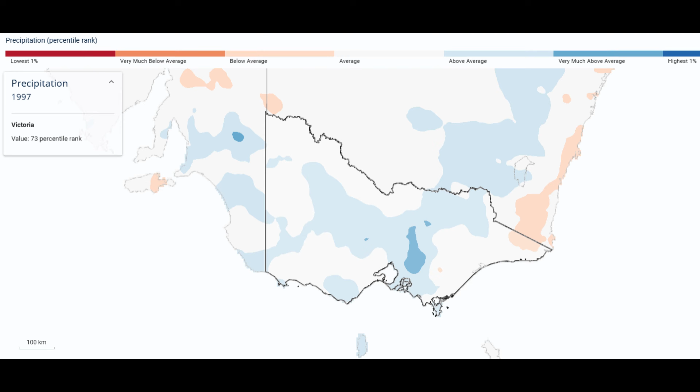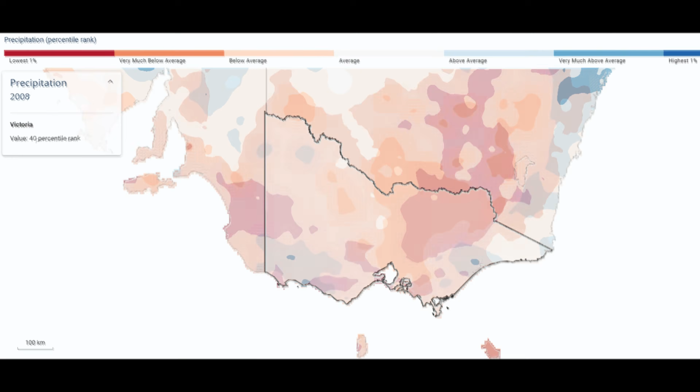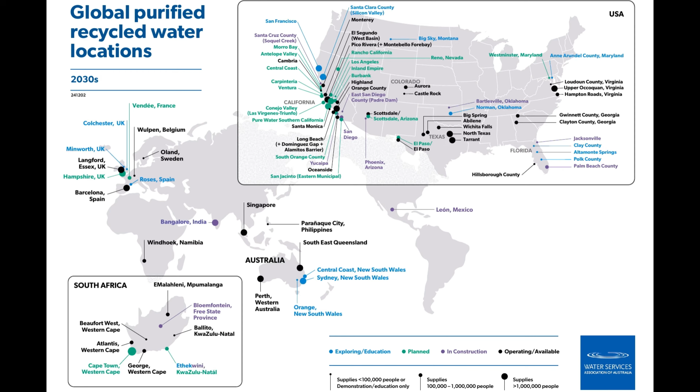As climate change intensifies and Melbourne's population continues to grow, traditional water sources like rainfall-fed reservoirs and rivers are becoming less reliable. Even with desalination and conservation, we need to think beyond old models. One idea gaining global traction is purified recycled water. It's already happening in places like Singapore, Orange County in California, and Windhoek, Namibia. These cities are turning wastewater into safe, high-quality drinking water using a process known as advanced water purification.

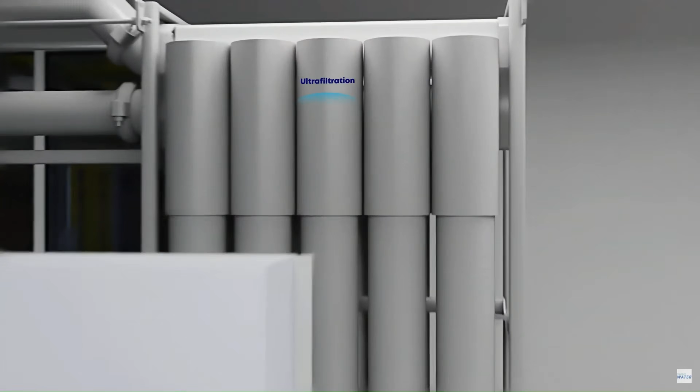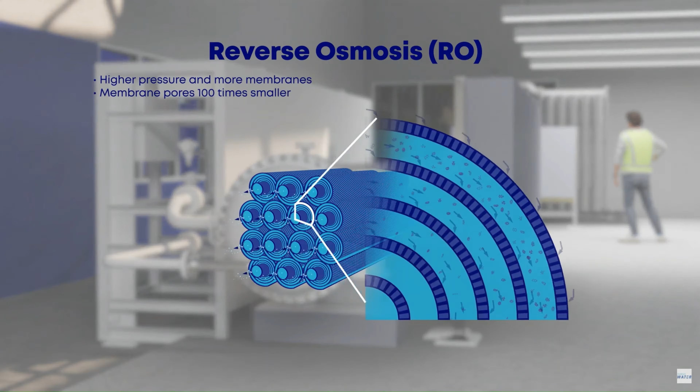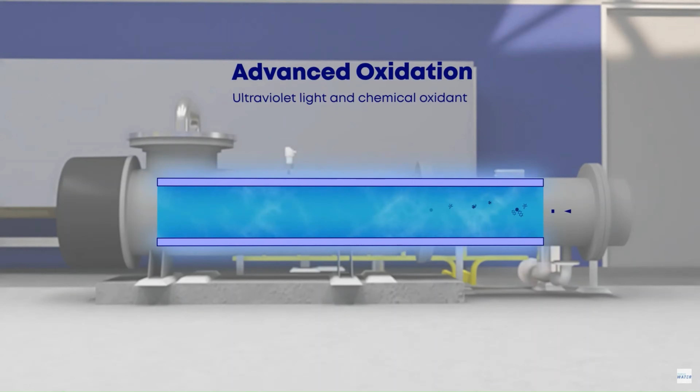So, could Melbourne be next? Let's explain how it works. Advanced purification begins with secondary treated wastewater, water that has already been cleaned of solids and contaminants. It then passes through a series of treatment barriers, including ultrafiltration to remove bacteria and suspended solids, reverse osmosis to eliminate dissolved salts, viruses, pharmaceuticals, and other micropollutants, and ultraviolet disinfection, often combined with advanced oxidation, to destroy trace organics and ensure human safety. The result is ultra-pure water, often cleaner than conventional drinking water.

In some cases, it's so devoid of minerals, we actually have to add things back into it to ensure it doesn't pull those key minerals from our own bodies as we consume it. Yep, that pure.

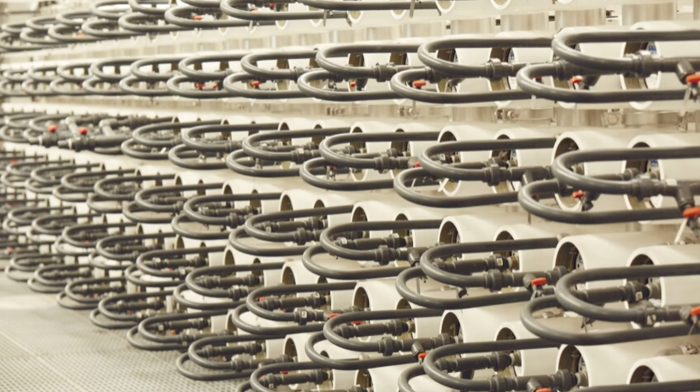Importantly, these aren't theoretical technologies. They're tested, regulated, and already in use. In Singapore, the NEWater system supplies up to 40% of the nation's demand. In California, Orange County's groundwater replenishment system has been operating for over 15 years and produces millions of litres a day. Windhoek has been using direct potable reuse since the 1960s, setting a global precedent.

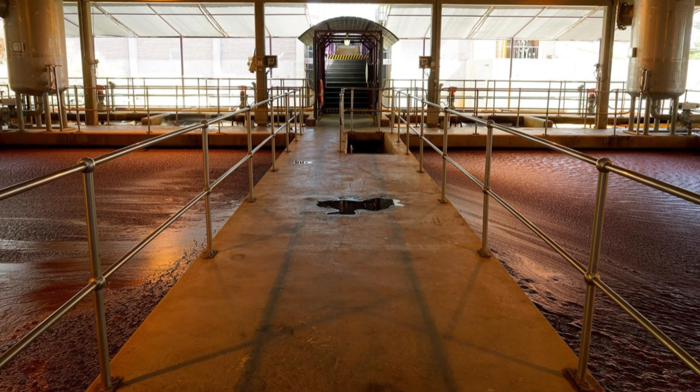So what's holding Melbourne back? The answer isn't technical limitations, it's perception. The phrase toilet to tap has been a stubborn barrier to community acceptance, but it's a misleading term. In reality, all water is simply reused, and it always has been, whether through nature's hydrological cycle or our own engineered systems. It's the same stuff that dinosaurs drank and peed. That's right, we're drinking millennia-old dino pee.

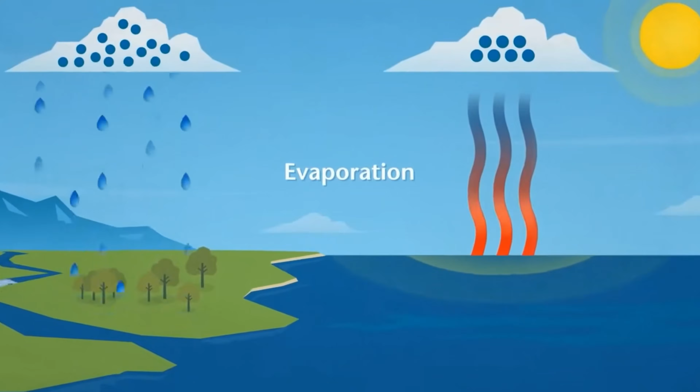When it rains on a farm, it soaks into the ground, flows into a stream, and eventually reaches your tap. It's passed through countless environments and biological processes. In numerous locations throughout Australia, inland towns draw water for their own supplies downstream of other towns, whose treated wastewater has often been returned to the same stream. So indirect reuse is already around, whether we want to acknowledge it or not. Advanced purification simply accelerates and controls that natural process, removing more contaminants with greater precision.

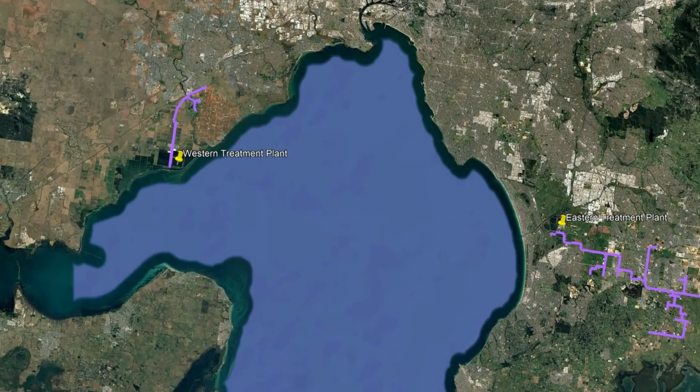Here in Melbourne, we're already recycling water for non-drinking water uses. Class A recycled water from the Eastern and Western Treatment Plants is used to irrigate parks, golf courses, and farmland. In many new housing estates, it's piped directly into homes for flushing toilets and watering gardens. The next step is considering whether purified recycled water should supplement our drinking water supply, especially in drier, less predictable climates.

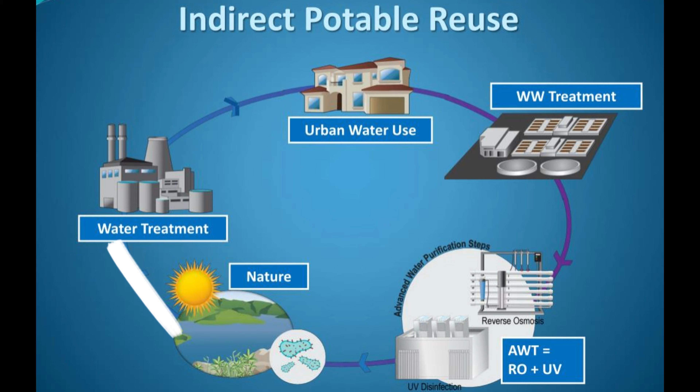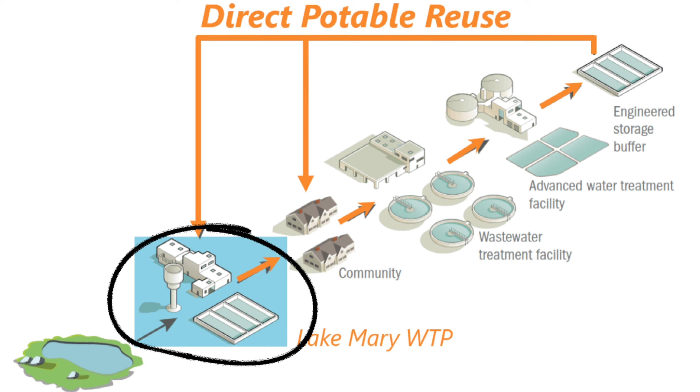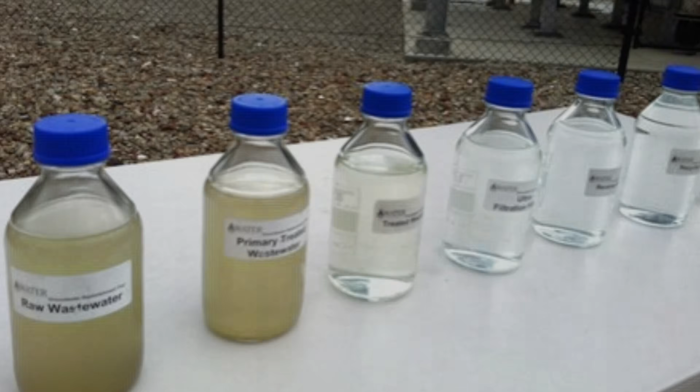There are two main models: indirect potable reuse, IPR. Purified water is added to reservoirs or aquifers where it blends with existing supplies before undergoing conventional water treatment. Direct potable reuse, DPR. Purified water is introduced directly into the drinking system under strict monitoring and real-time controls. Both approaches are being explored throughout Australia. Perth already has an IPR scheme, where purified recycled water is injected into deep aquifers to replenish the city's groundwater supply.

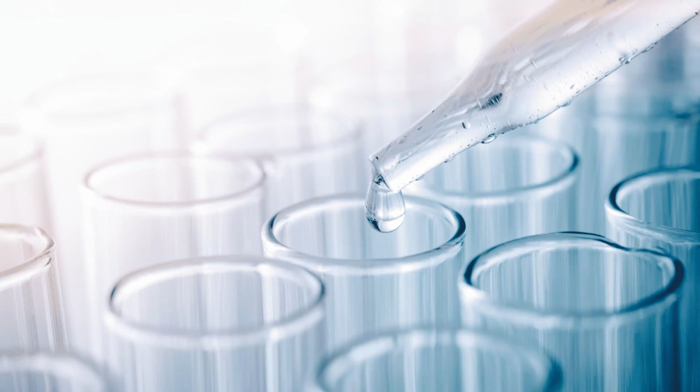For Melbourne, the main challenge isn't technology, it's building public trust. Community engagement, education, and transparency will be critical. Global case studies show that acceptance grows with familiarity. When people understand the science, the safeguards, and the benefits, support follows. That means engineers and scientists must play an active role in public communication, not just behind the scenes, but out front.

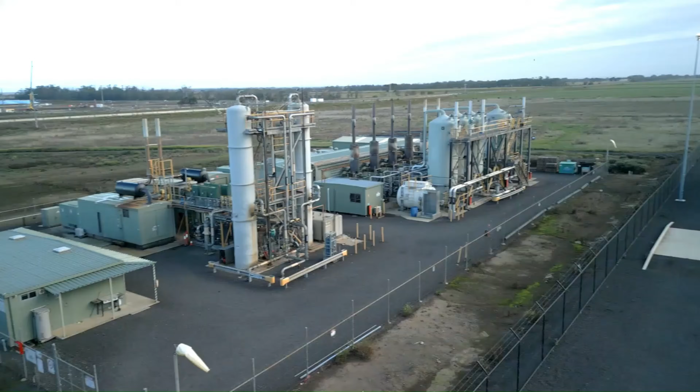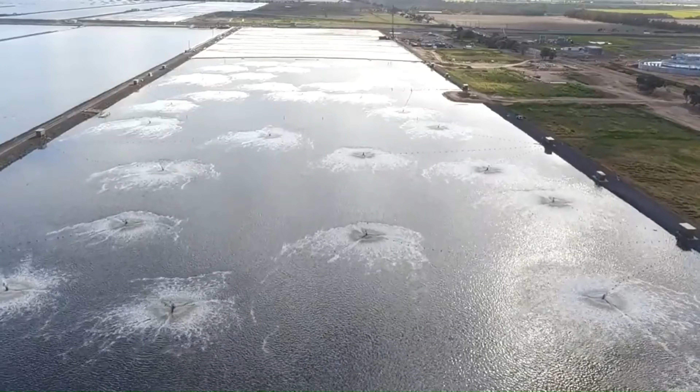But water isn't the only resource hidden in wastewater. Modern treatment plants are also becoming hubs for energy recovery. As sewage breaks down, it releases biogas, mostly methane, which can be captured and used to generate electricity. At the Western Treatment Plant in Werribee, Melbourne Water produces up to 95% of the site's electricity from biogas, dramatically reducing both emissions and overall operating costs. Some of this energy now powers electric vehicle chargers and site lighting.

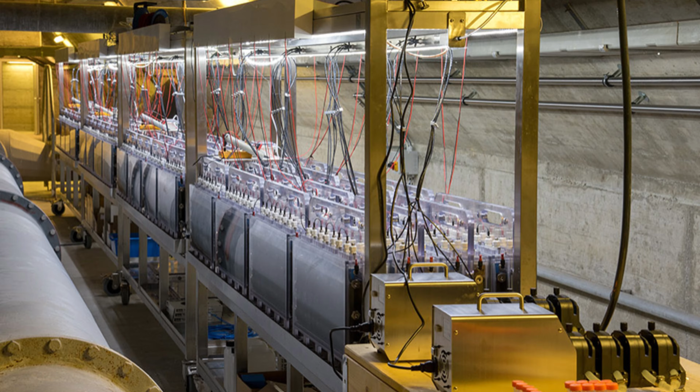In the future, we could go further. Emerging technologies are being developed to convert wastewater into hydrogen gas, a clean energy source with broad potential. Hydrogen production requires plenty of water, and conveniently, sewage is effectively made up of 99% water. Others are investigating microbial fuel cells, which generate electricity directly from organic matter in sewage.

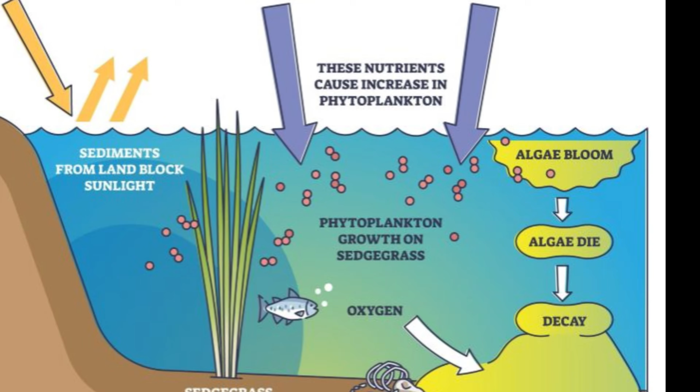Wastewater also contains valuable nutrients, especially phosphorus and nitrogen. Traditionally considered pollutants, these are now being recovered elsewhere in the world and used as fertilizers, reducing reliance on mined phosphorus and closing the nutrient loop. This shift, often referred to as resource recovery, marks a turning point in wastewater management. Instead of asking, how do we get rid of this? We now ask, what can we recover from this?

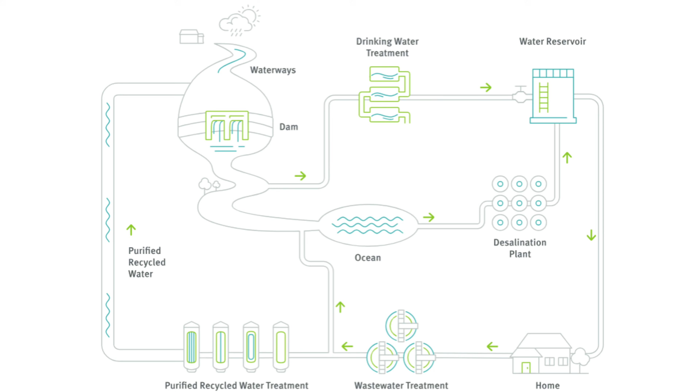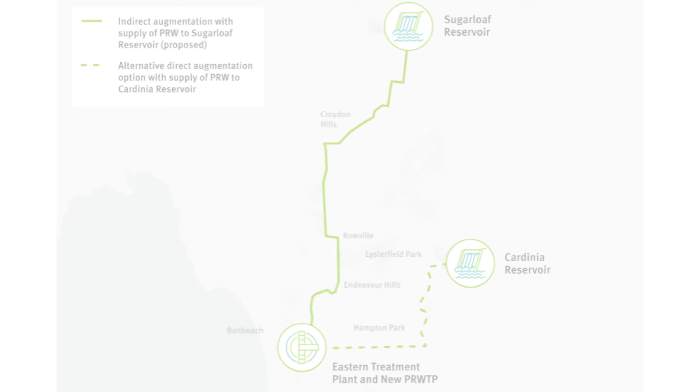Of course, these changes won't happen overnight. They require investment, policy reform, and long-term planning, but they're already in motion. Melbourne Water and its partners are currently leading several major research programs, testing advanced purification technologies, mapping public attitudes, and developing business cases for future large-scale adoption. Engineers, environmental scientists, economists, and social researchers are also all involved, because this isn't just a technical issue, it's a community one.

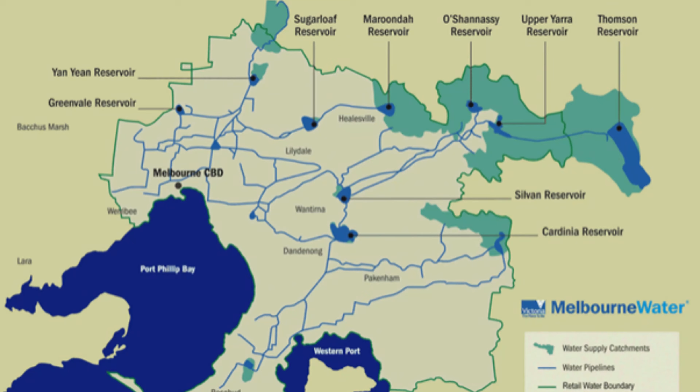If Melbourne chooses to pursue purified recycled water in the future, it won't just be because the infrastructure is ready. It'll be because the public understands, supports, and trusts the system. And that trust won't be built in a lab. It'll be built in conversations, in schools, in workplaces, and throughout households. Wastewater is no longer just a liability, it's an opportunity for cleaner water, for greener energy, for more sustainable cities. The challenge for Melbourne, though, is to harness that opportunity with vision, care, and engineering precision.

In our final episode in this sewerage series, we'll step back and reflect on the entire journey, from Melbourne's public health crisis in the 1800s to the globally respected water and sewage system we operate today. We'll explore the lessons we've learned and what they mean for engineers, planners, and the communities of tomorrow.